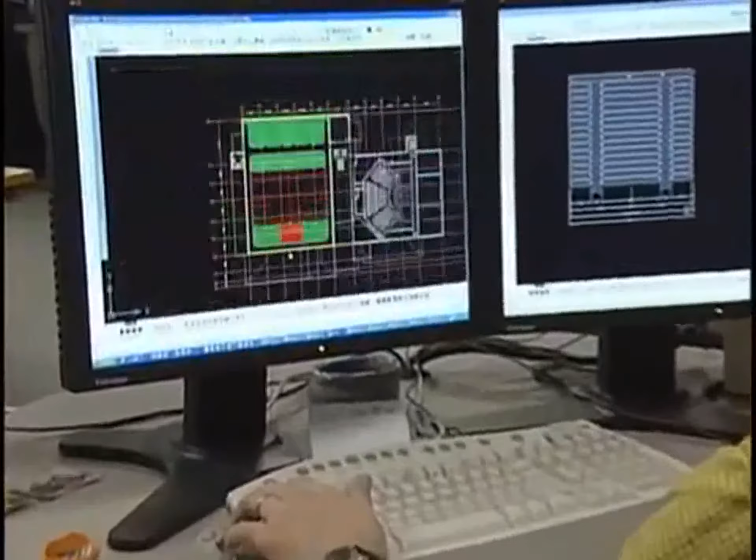The course covers telescopic seating systems, design considerations, bleacher types such as wall attached, recessed, reverse fold, freestanding floor attached, and mobile bleachers. You will learn about common seating surface options. We will discuss applicable codes pertaining to aisles and ADA requirements.

We will cover required and optional accessories, such as aisle rails, intermediate steps, end rails, back panels, and back rails, vinyl side curtains, power systems, and backrests. You will learn some basic components of the bleacher understructure, and we will point out important considerations for coordination with other trades. At the conclusion, we will review the main points and answer any questions you may have.

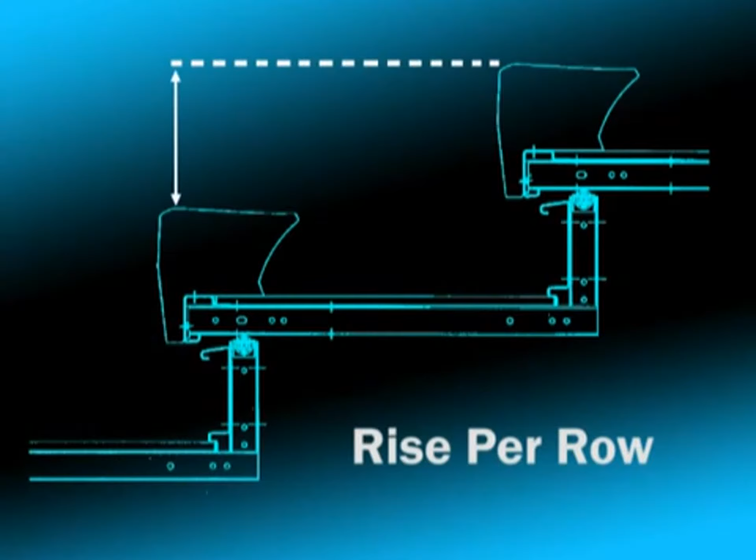We begin with a glossary of terms to help you become familiar with specific references made throughout the course. Following is a glossary to help familiarize you with terms commonly used in describing bleacher components and attributes. Rise per row. This is the vertical dimension from seat top to seat top or deck to deck. Multiple standard rises are available. Increased rise provides a better and more comfortable seat height and better sight line.

Row span. This is the horizontal dimension from front of seat to front of seat. Typical spans are 22-inch, 24-inch, and 26-inch depth for bench bleachers. Wide span depths of 30-inch, 32-inch, and 33-inch are available for VIP seating options.

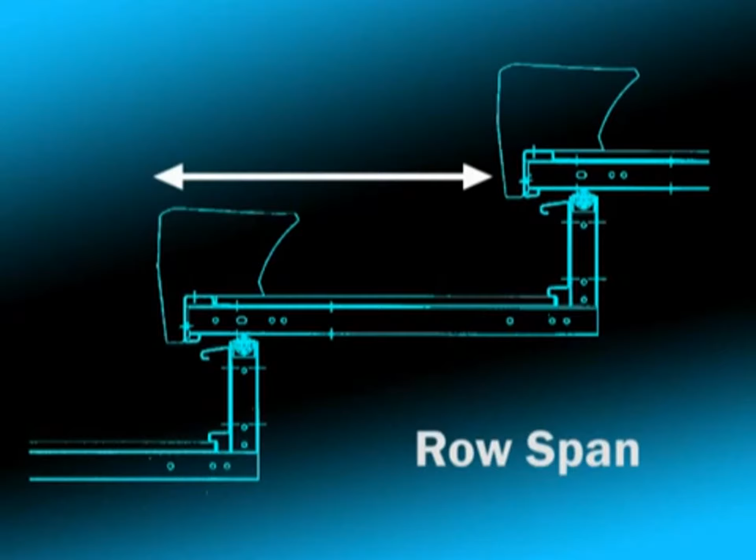Extended dimension. This is the distance from the wall or back rail to the front of the first row of seating with the system in its fully open position. The overall clear dimension will include the code-required first step. These dimensions will vary by number of rows, span, and wall obstructions.

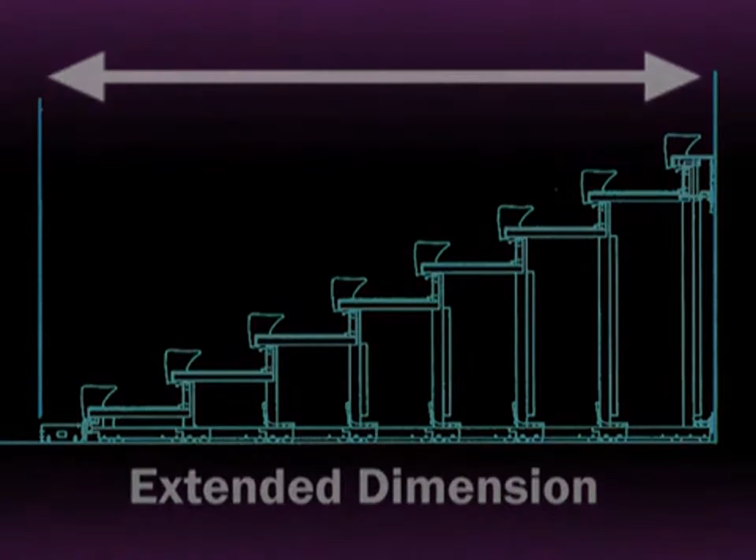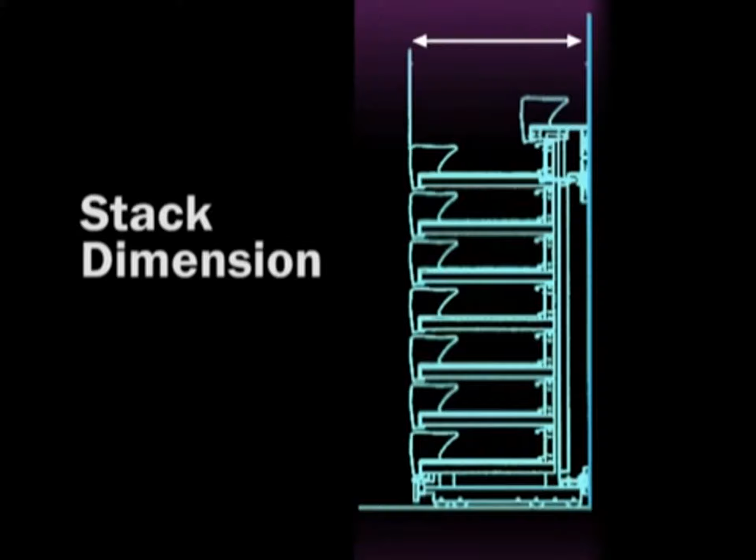Stack dimension. This is the distance from the wall or back rail to the front of the first row when the system is retracted or stacked. The stack size will vary if wall obstructions are present or with higher row reverse fold systems. Seat height. This is the height from the top of the seat to the deck surface.

Section. A section encompasses the deck assembly, seating options, and understructure that are the three major components of a bleacher system. Standard section lengths vary up to 26 feet, depending on number of rows and the bleacher type.

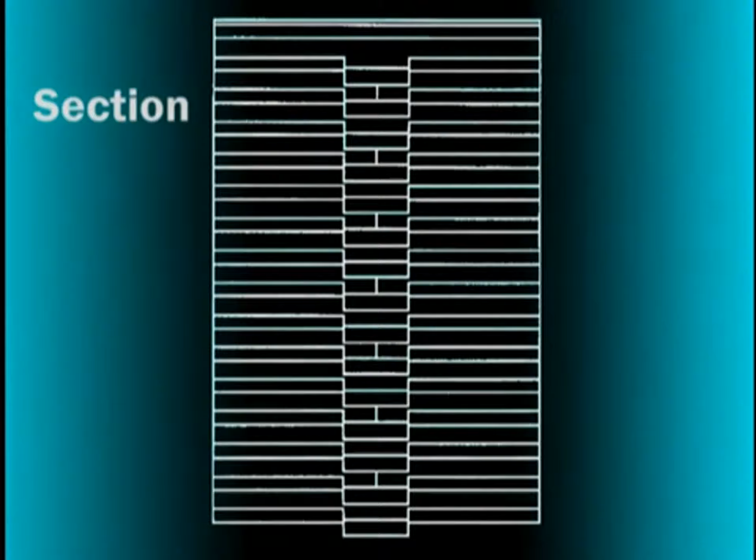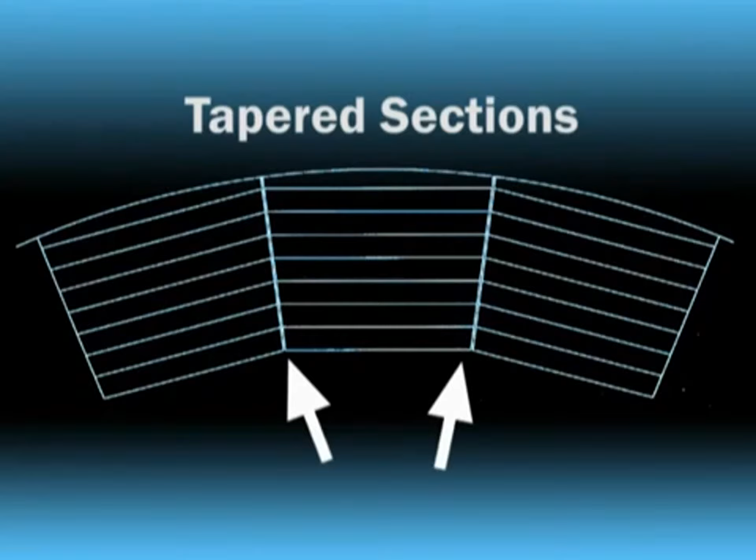Tapered sections. Used in radius corner applications, a tapered section is essentially a standard section with angled ends. This may be used with wall-attached, freestanding, recessed, or mobile units. While this option adds costs and complexity to the project, the use of tapered sections provides optimum sightlines and can produce a dramatic arena feel to the installation.

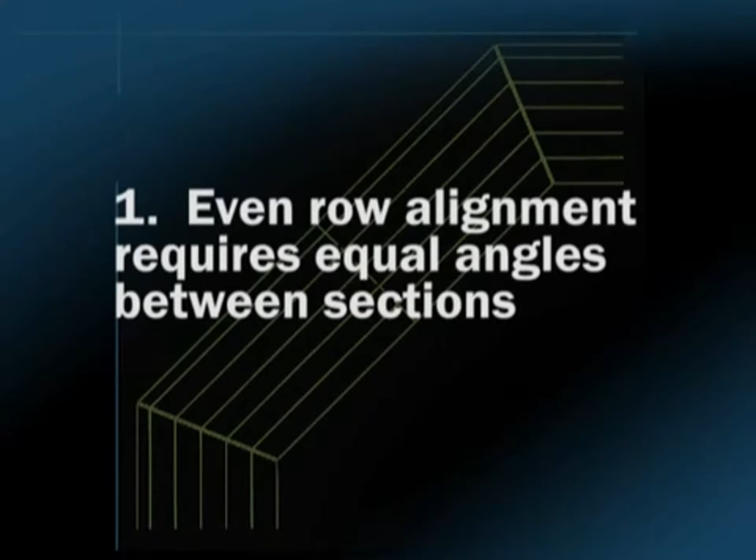The general guidelines and limitations to tapered sections are: Number 1. Even row alignment requires equal angles between sections. Number 2. Maximum angle of 22.5 degrees. Number 3. The first row length is required to be a minimum of 5 feet 0 inches, or a quarter of the length of the last row, whichever is greater.

Bank. A bank is comprised of a number of structural sections grouped to function as one group but not necessarily tied together. Bank lengths can vary from 16 feet to several hundred feet.

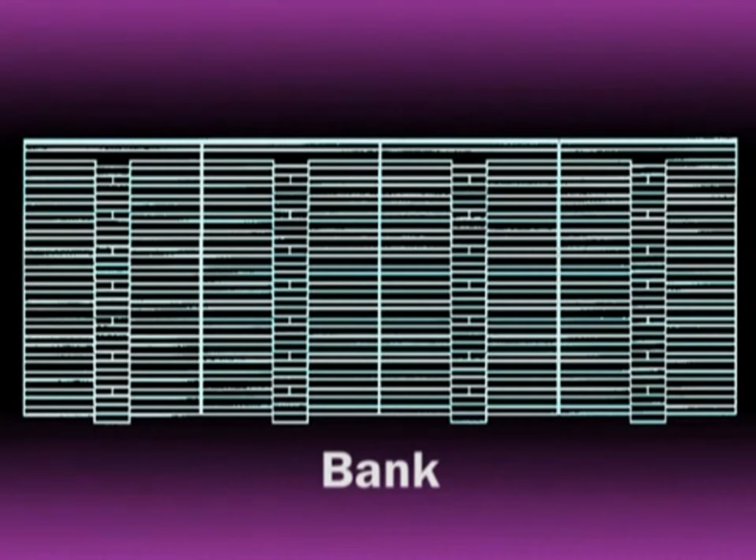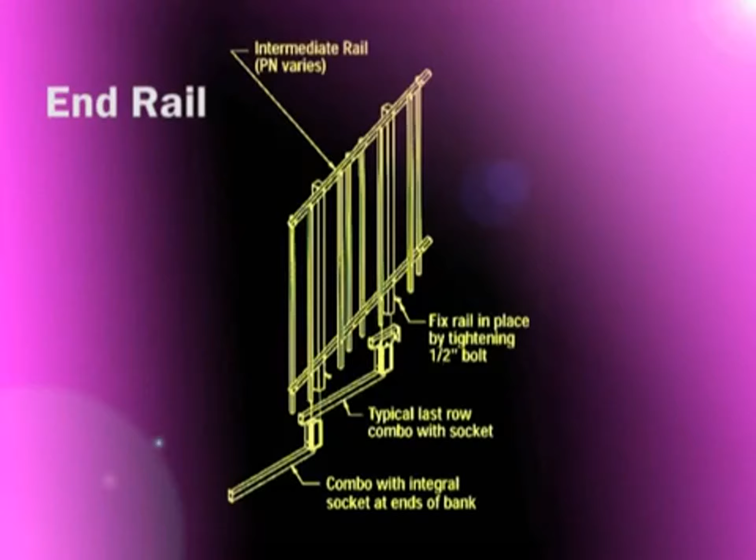End rail. End rails are located at bank ends of seating that are not located adjacent to a wall. All current building codes require end rails in this application. All end rails are designed to not allow a 4-inch sphere to pass, meeting the maximum clearance requirement, and also contain vertical members to eliminate ladder effect.

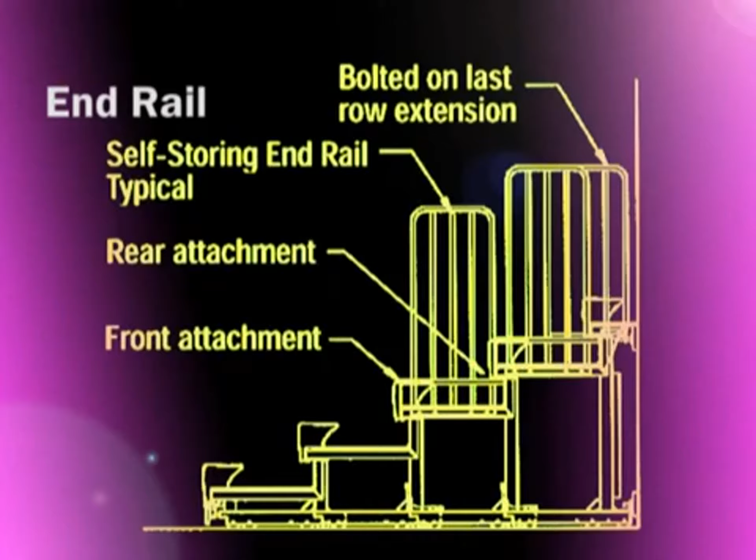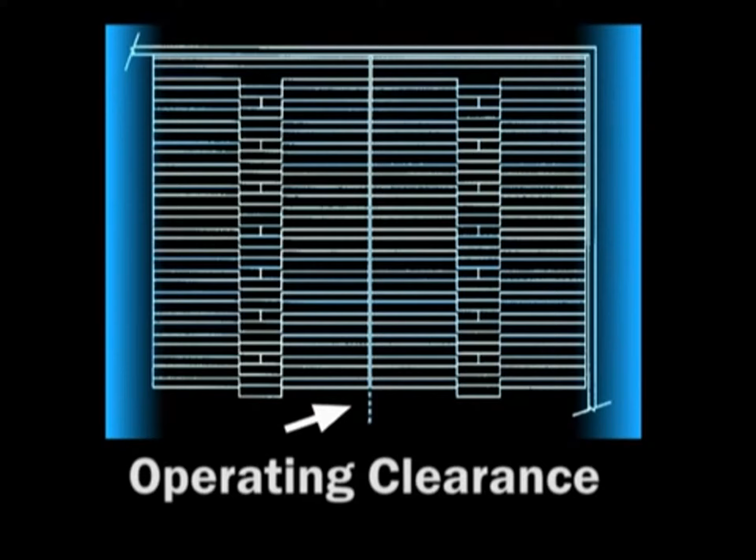Operating clearance. Referred to in two ways: 1. The operating clearance between sections. On manually operated banks, space is required between sections to assure adequate operating clearance. This helps eliminate binding and damage to the system if sections are not opened in straight alignment.

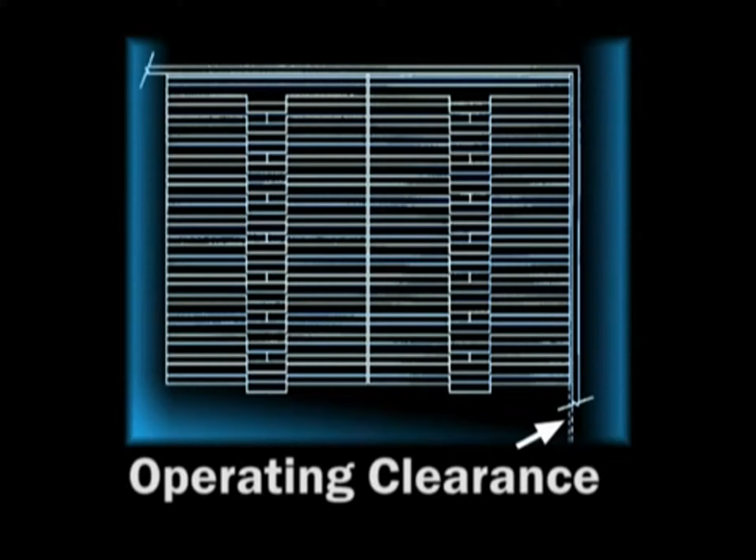And 2. The operating clearance to the side wall. This is the space required between the end of sections or rails and any wall or obstruction. In case sections are not opened in a straight alignment, this helps eliminate binding and damage to the system. The space required varies by number of rows and type of operation, but never exceeds the maximum 4 inches required by all building codes.

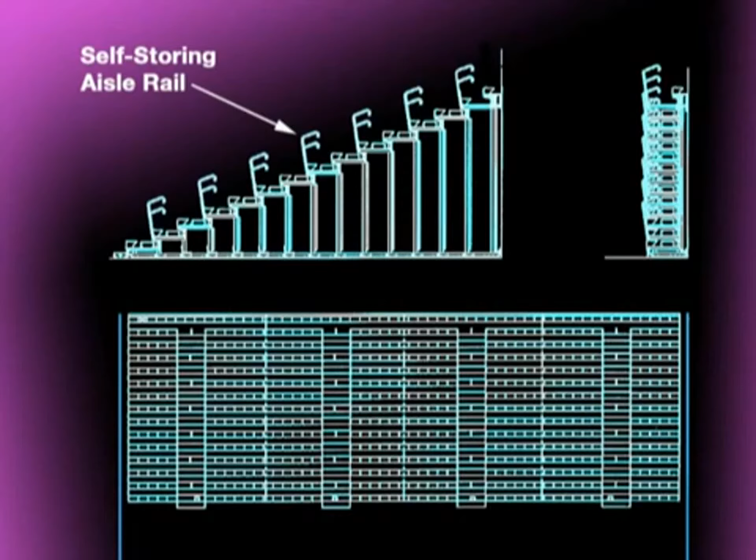Aisle rails. Aisle handrails are required by all current building codes. They are located in the center of each dual-access aisle and are available in several types, which will be discussed later in this program.

Intermediate steps. Intermediate steps are also required by all current building codes. They are provided to create a safe walking surface by providing an equal depth and height step at all aisle locations.

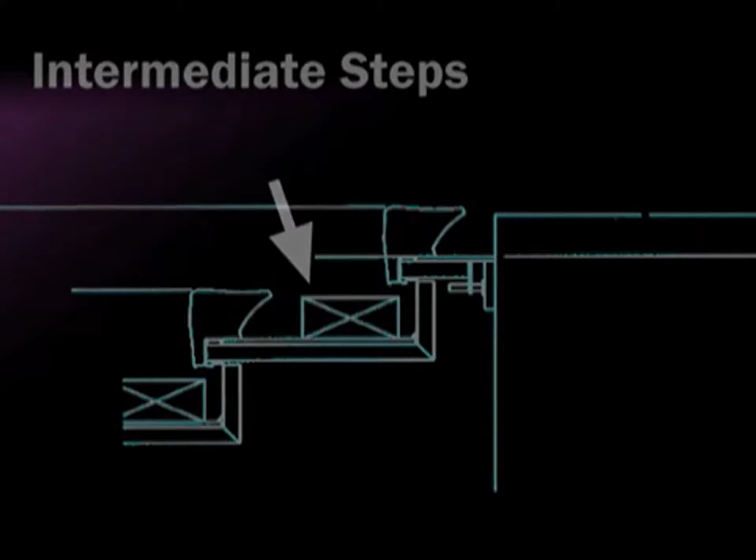Section 1. Design. Section 2. Bleacher types. Section 3. Applicable codes. Section 4. ADA provisions. Section 5. Optional accessories. Section 6. Understructure. Section 7. Coordination with other trades. And Section 8. Review.

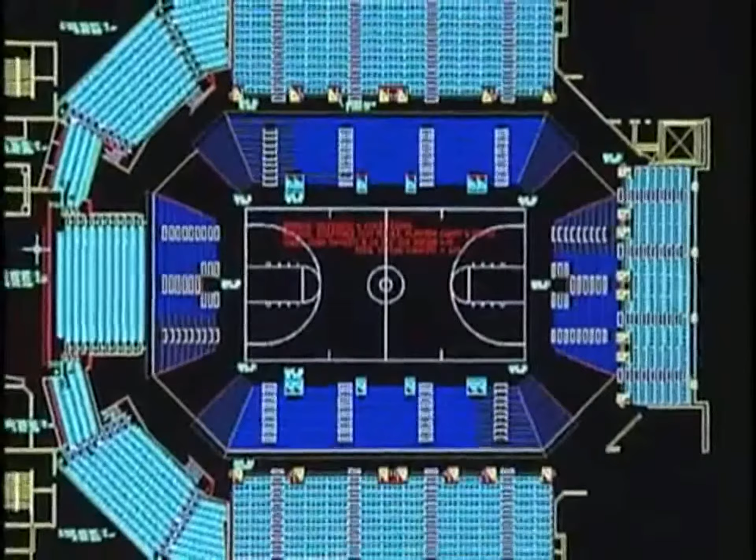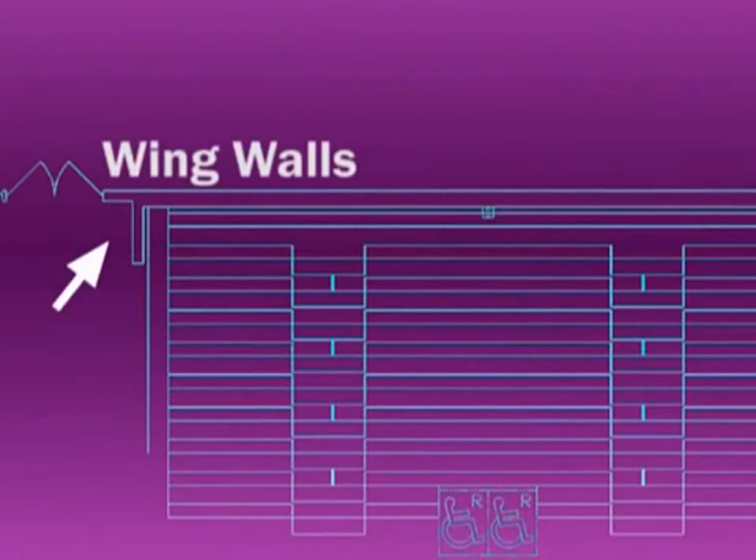Section 1. Design. The design process when planning telescopic seating for a facility starts by determining available space. Consider the length of clear space and depth available. The available length for telescopic seating is determined by the building design and location of doors, wing walls, and other wall obstructions, such as columns, pipes, and heating units.

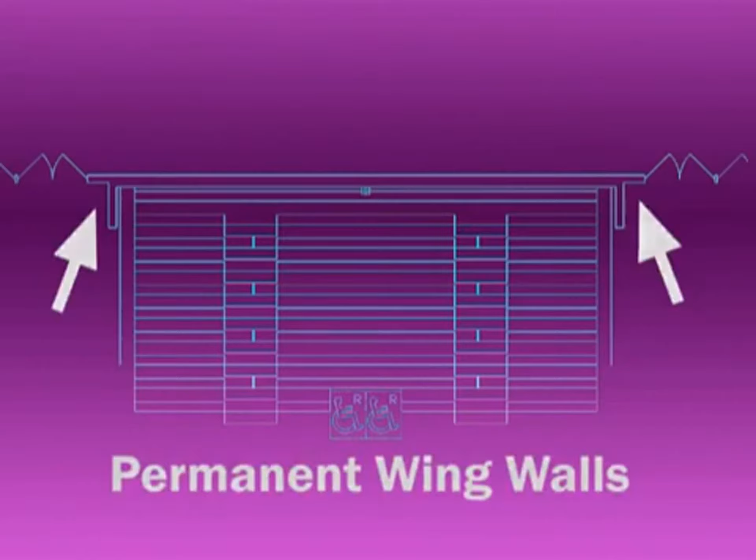The following drawings show examples of typical applications such as banks of seating between door openings, banks of seating between permanent wing walls, banks of seating in wall-to-wall applications. Depth is determined by span per row and number of rows. Typical spans include 22, 24, 26, or wide deck platforms 30, 32, 33.

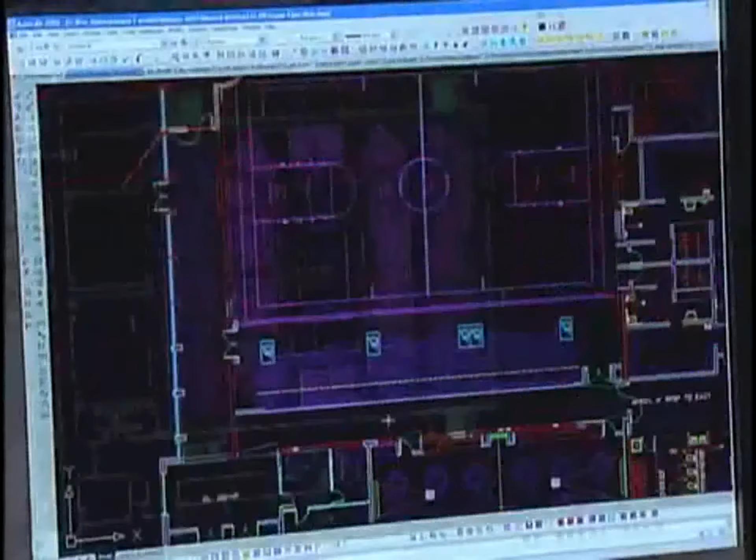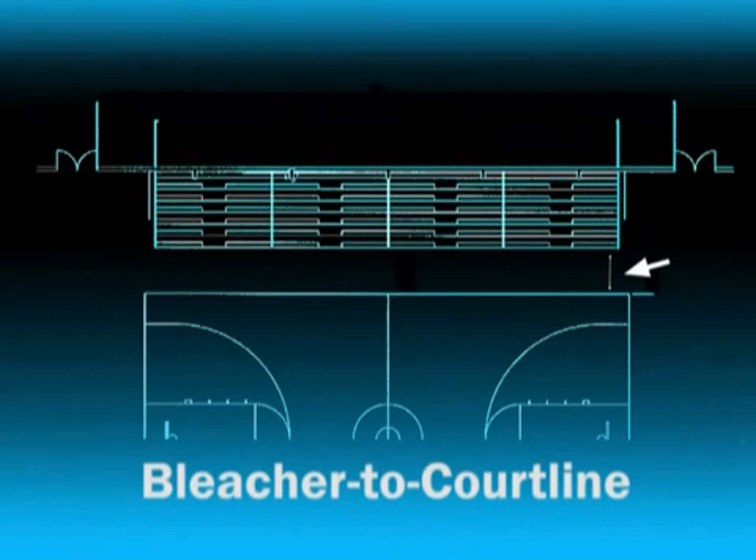Available depth clearances in a gymnasium are typically governed by the wall-to-court line clear dimension. Coordination with the end user on the amount of clearance from the extended bleacher to the court line is an important item for you to discuss with your client. Check with local governing agencies for recommended minimum clearances at both side court and end courts to ensure optimum safety code compliance.

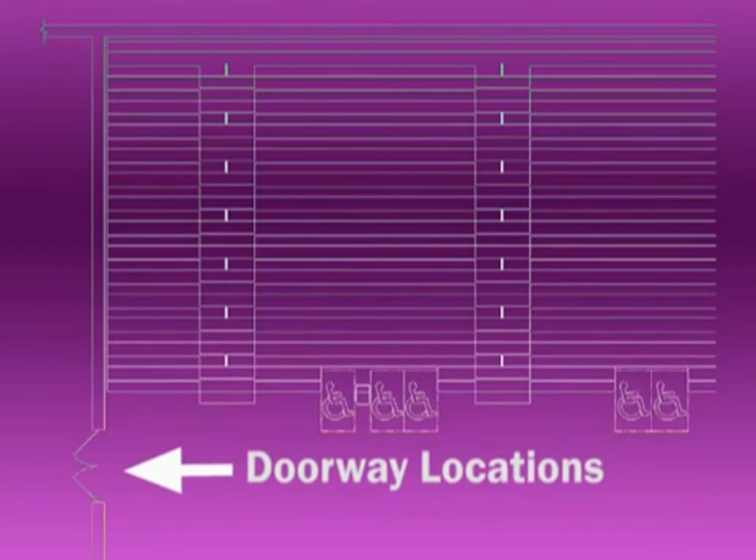Locations of doorways on the side walls will affect the bleacher depth. Please coordinate these locations with the bleacher extended dimensions. Identify height restrictions in order to determine rise per row such as 10 1/4, 11 1/2, or 16 inch.

Consider whether balcony access is required and plan for any obstructions such as basketball backboards, columns, door openings on side walls that may need to be accessed at all times. Other characteristics of the gymnasium, such as protruding pipes and heat registers, need to be taken into account.

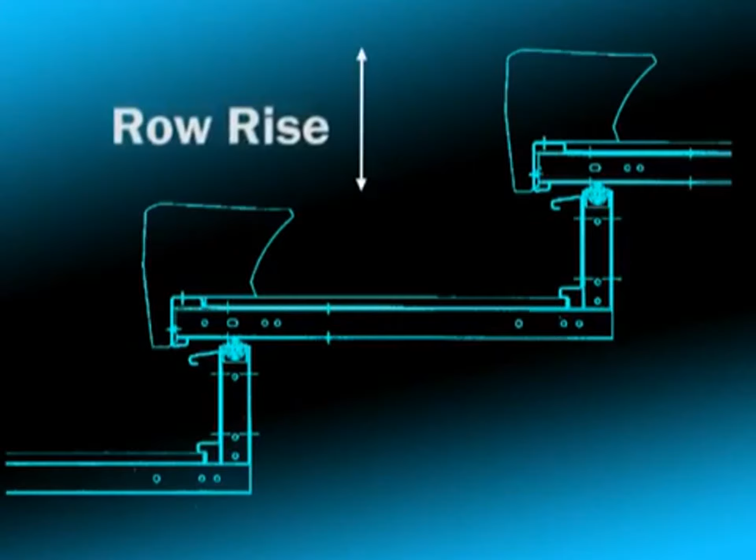Proper row rise, the vertical dimension from seat top to seat top or deck to deck, is important to achieve adequate sight lines. Multiple standard rises are available and increased rise provides a better sight line. 11 1/2 or 16 inch rise is recommended for optimal sight lines on balconies. Less than 11 1/2 inches rise does not provide wide scope vision of the main floor activities.

If balcony access is required, the rise per row will vary depending on the number of seating rows that will be provided. Careful planning of the number of rows, span per row, and rise per row is required to fit into the available depth. As an example, if a row must be added to achieve access into a balcony, the overall depth of the bleacher will increase and may push your bank of seating too close to the court line.

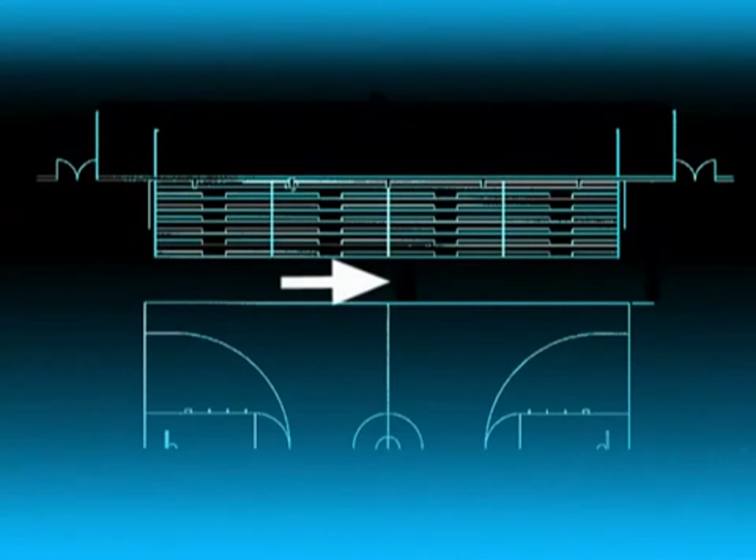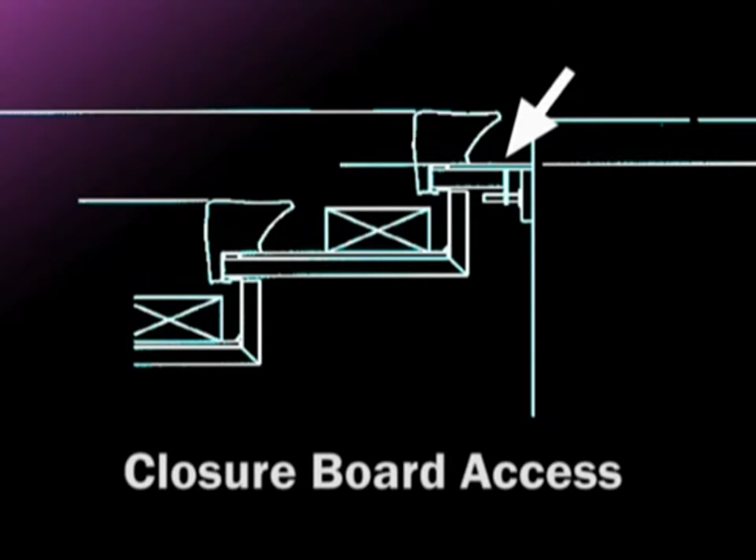There are several options available to achieve a smooth transition into the balcony. Options shown here include alternate standard rises, closure board access, extended closure access with additional step. A custom rise can be provided if all of these options shown do not work in your application. A custom rise for telescopic seating is very expensive to engineer and manufacture. For that reason, it should be the option of last resort.

Certain building codes allow for an uneven transition to adjoining construction if the steps are highlighted with contrasting color strips. Be sure to provide for adequate clearance of obstructions. Overhead obstructions are items such as side court backstops, lighting, building truss and ductwork. Overhead clearances for backboards, light fixtures, acoustic panels should be out of reach of spectators when they are standing on the bleachers.

Look for and dimensionally locate any doors, windows, pipes, ductwork, drinking fountains, columns, electrical boxes, conduit, cross bracing, floor or wall vents, divider walls or curtains, wall pads, fire extinguishers, switches, and outlets, including sidewalls. This will eliminate potentially non-code compliant conditions and provide an unobstructed view for the spectator and not hinder the operation of the bleacher. Also verify the minimum applicable building code clearance required above the last deck or last row seat.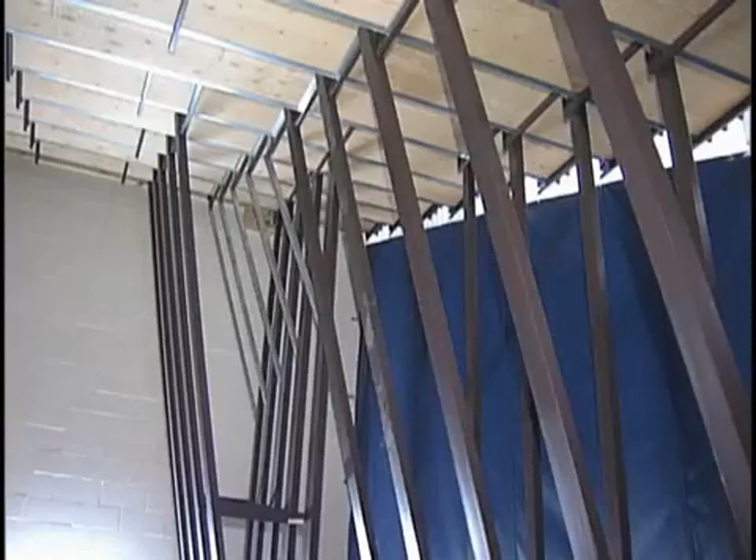Typical construction for this application may include block walls and poured concrete walls. In this typical application, the bleachers open in the forward direction. They are commonly available up to 30 rows and utilize either wall attachment and/or floor attachment. They may be specified with either manual or power operation. Rear cutouts may be necessary to accommodate column projections and other obstructions.

Standard sections offer best economy. Individual sections make up banks of seating. For cost efficiency, use standard section lengths and minimize the number of sections in each bank. For example, a 100-foot bank of seating may consist of 4 25-foot sections. Code compliance and all load testing data is based on the longest possible section lengths.

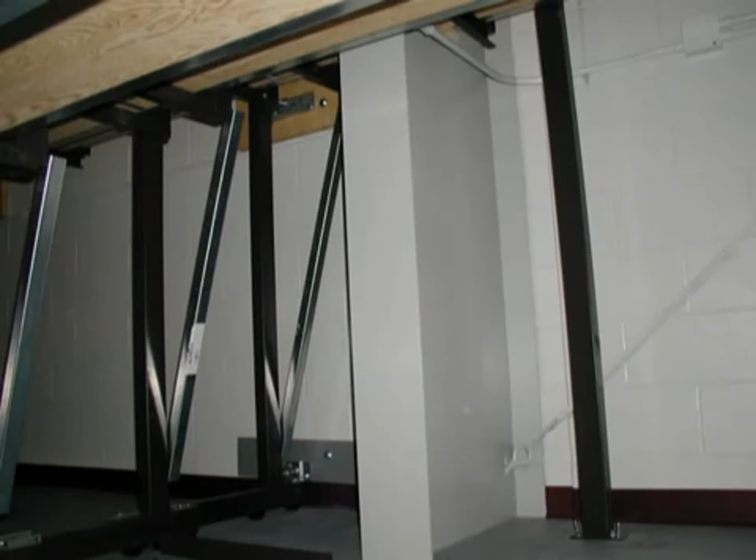Certain wall requirements should be taken into consideration. Ideally, the walls to which the seating will be attached will not have column projections or other obstructions greater than 1.5 inches. When columns extend further than 1.5 inches into the room, it is recommended that the seating be cut out around the column rather than installing in front of the column and filling the space to the wall, or employing back rails. Both of the methods are more expensive and require more extended dimension than the cutouts. At column cutout locations, structural supports are added to ensure the deck surface is properly supported. Plywood decks are scribed tight to the columns to eliminate all gap openings.

Recessed telescopic seating systems require minimal clearance to fit conveniently under a balcony overhang. Typically, a recess is created by extending the balcony over the main floor and using this space as storage for the retracted telescopic bleachers. The purpose is to achieve more balcony space and more usable main floor space when the system is fully retracted. Available with various seating options and typically up to 30 rows.

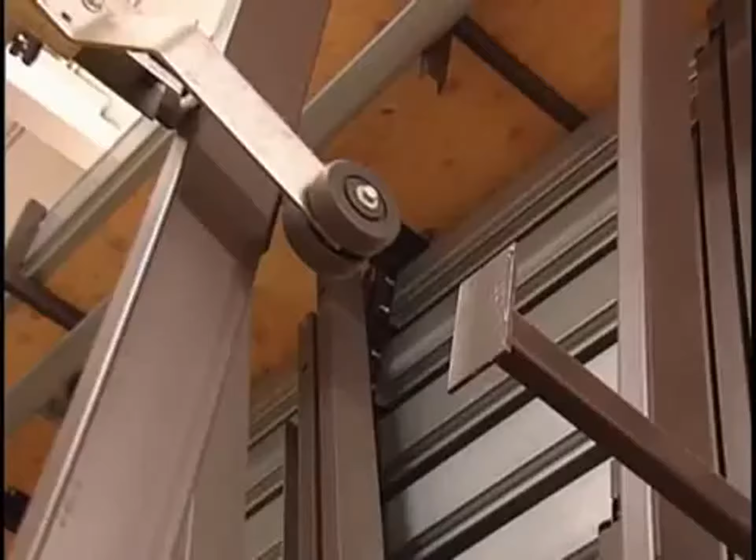With the proper engineering, the unit can be closed nearly flush with the back wall, allowing the stacked bleacher to be contained completely under the overhead walkway. A recessed system utilizes extra rows of understructure linkage or scissor mechanisms in order for the bleachers to stack under the balcony. It is important to note that recessed system stack dimensions are larger than wall-attached systems. The recess opening or clearance between the top of the last row seat and the underside of the recess is recommended to be approximately 3 to 4 inches, but can be as small as 1.5 inches.

Since the recessed units can serve as access to the balcony seating, it is necessary to coordinate the balcony height with the height of the last row of seating. Recent building code changes allow for step heights to vary as you transition to adjoining construction if properly marked with contrasting step colors. These tolerances may be unachievable and code variances may be required. Please consult the manufacturer for design assistance.

Reverse fold systems are designed for applications where space behind the bleacher stack is desired for other activities when the bleacher is not in use. This is common in areas such as mezzanines or balconies. Typically, up to 18 rows can be specified with this type of system. Reverse fold units are frequently seen in balconies, but can also be used on the main floor. This type of application is mounted to the floor at the first row, and the entire unit moves in a reverse direction until fully extended.

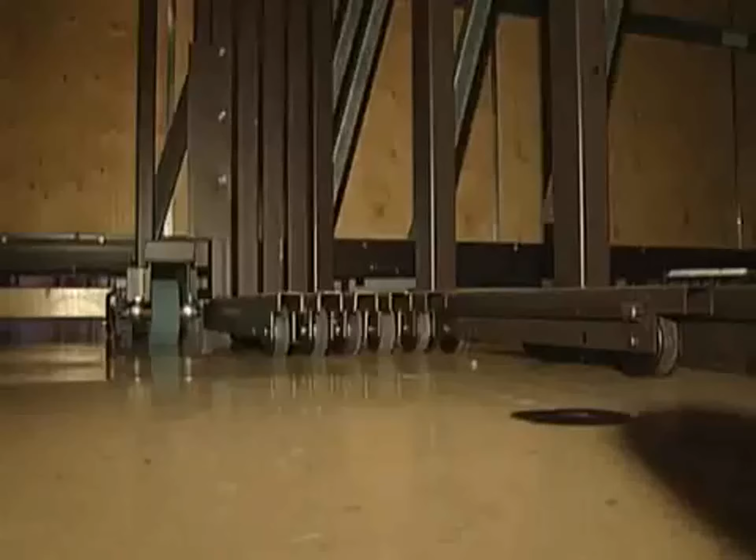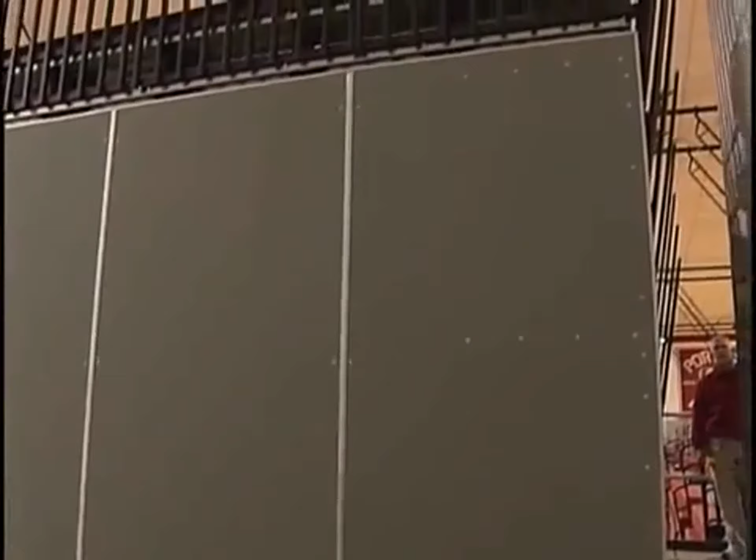These units create a natural wall to separate areas. Since reverse fold systems are generally located away from a permanent wall, back panels and back rails are required for spectator safety. The standard height of the back panel is 8 feet. The back rail design shown here contains vertical intermediate members to eliminate ladder effect.

Proper row rise is important to achieve adequate sight lines. 11.5-inch or 16-inch rise is recommended for optimal sight lines on balconies. Less than an 11.5-inch rise does not provide wide-scope vision of the main floor activities.

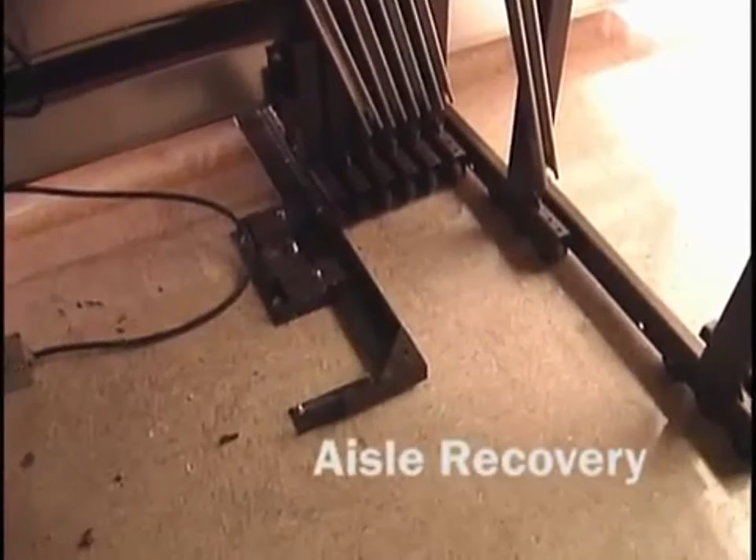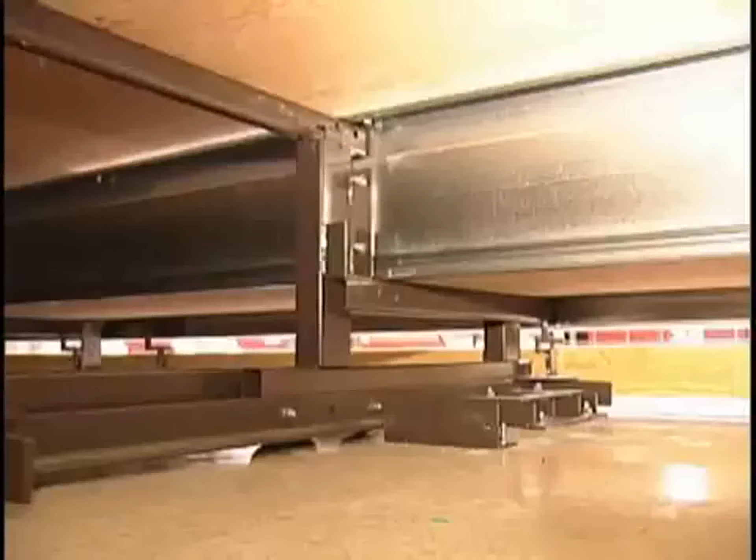This is achieved by a concealed mechanism under the lower rows. The freestanding floor-attached method is an option when wall construction or building shape won't allow you to attach to the wall. In these cases, there are systems that attach to the floor. Applications may include metal walls or round buildings.

Similar to wall-attached units, freestanding systems are permanently attached to the floor only. It is very important to verify that the flooring is suitable to anchor the rear row vertical posts of the bleacher. When freestanding units are located away from a wall, back panels and rails are required for safety purposes. The standard height of the back panel is 8 feet.

Typical freestanding system guidelines are 20 rows at 10.25-inch rise, 17 rows at 11.5-inch rise, and 12 rows at 16-inch rise. Always contact the manufacturer for additional information specific to applications requiring more than 20 rows, and note that larger stack dimensions may be required.

Mobile systems consisting of single sections of bleachers up to 21 feet wide can be used in one part of a building and stored in another on the same floor level. They offer increased flexibility since these are independent, self-supporting units that do not require anchorage to either wall or floor. Typically used in the gymnasium, music room, cafeteria, and classrooms, they provide the ultimate in flexibility along with easy manual operation.

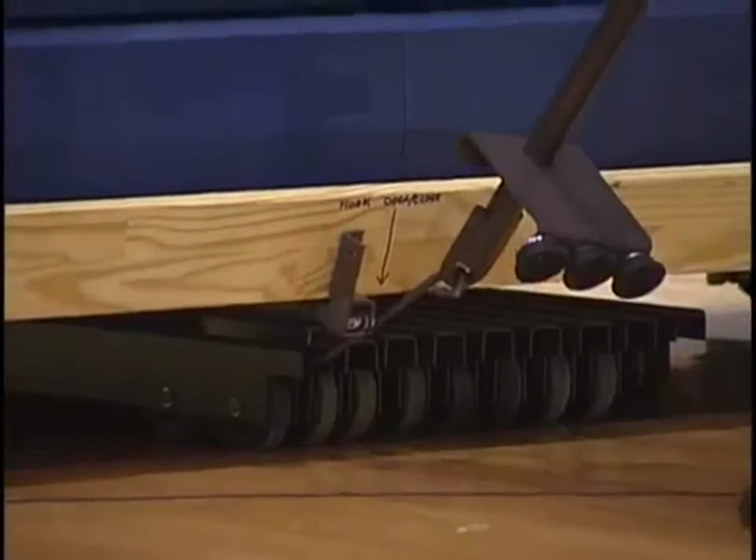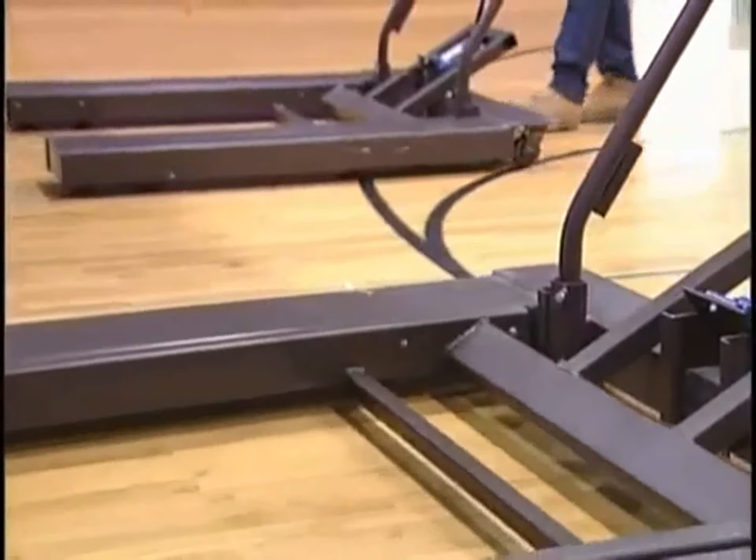Manufacturers offer them with various seating surface options, typically up to 14 rows at 10.25-inch rise and 12 rows at 11.5-inch rise, and all available back-to-back seat spacing. Portable hydraulic dollies are required for transportation of units up to 14 rows to and from various spectator or storage areas. Hydraulic trucks are required to move mobile units. They are freestanding. One pair may be utilized for moving multiple sections.

The row limitation on wood or concrete floors is a maximum of 12 rows with an 11.5-inch rise, or 14 rows with a 10.25-inch rise. On synthetic floors, a maximum of 9 to 11 rows is recommended for convenient handling. With proper planning, the desired seating capacity can be achieved without oversized mobile units that can be difficult to handle.

Back panels and back rails are required by code for safety purposes. The standard height of the back panel is 8 feet. When the units are open or closed, back panels provide a flat wall surface and discourage access to the understructure. The back rails shown on this unit contain vertical intermediate members that eliminate the ladder effect and discourage climbing.

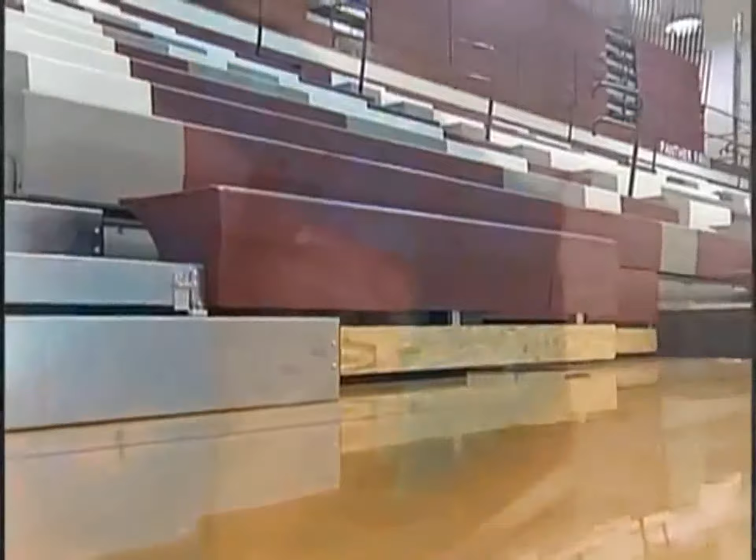Manufacturers have varying methods of attaching the plastic modules to the deck. In the example shown, a specially designed attaching clamp provides maximum rigidity with steel-to-steel connection of the module. Here each module incorporates full half-inch perimeter interlock to secure one module to the next for increased strength. 5 vertical and 2 lateral ribs inside each module provide increased strength and are positioned for easy cleaning.

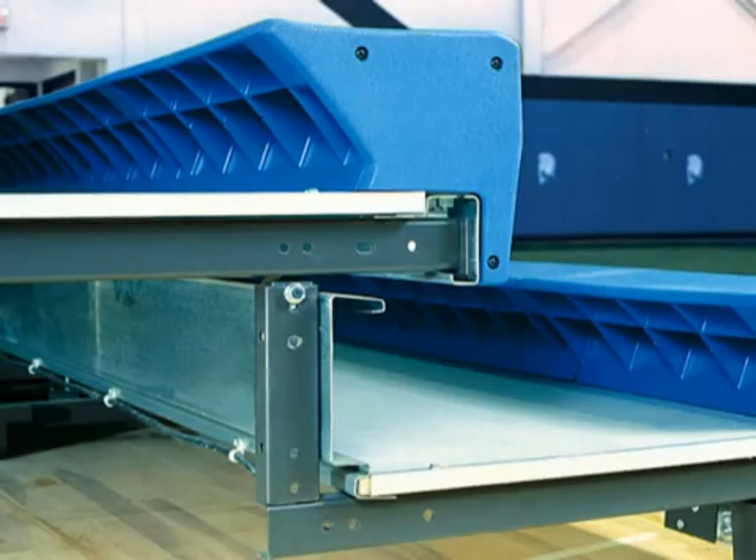Classic wood bench seating is typically constructed of 3/4-inch grade B and better southern yellow pine with a clear polyurethane coating. These wood seats and front riser boards are finished in classic style to enhance the appearance of the gymnasium or field house.

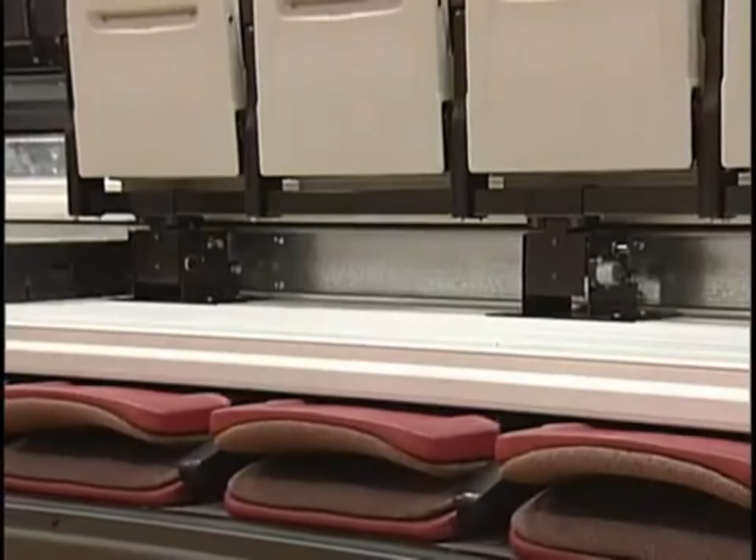Platform chairs can be mounted on the telescopic understructure to create a VIP seating area. Manufacturers offer them with manual or semi-automatic operation. They are only available with back-to-back spacing of 30, 32, or 33 inches.

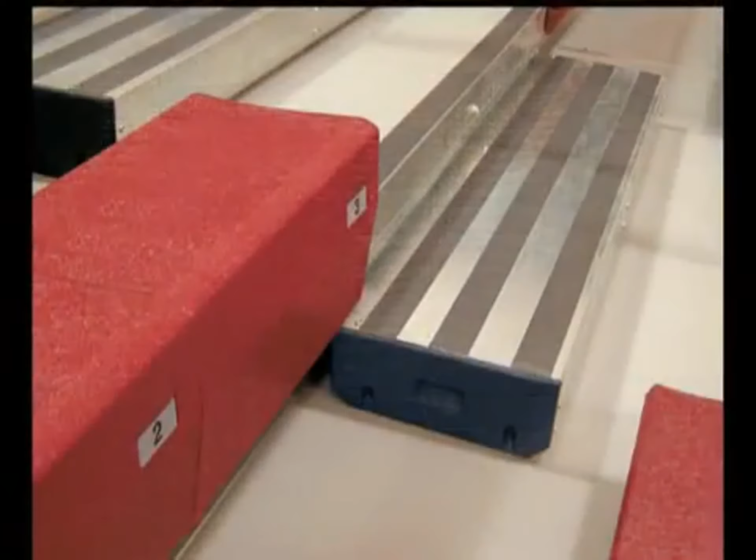Section 3. Code Compliance. Every bleacher configuration must conform to applicable code requirements for center aisles, center aisle rails, intermediate steps, back panels and back rails, along with safety end rails. Aisle center rails are installed on alternating rows and are required by all building codes for spectator safety.

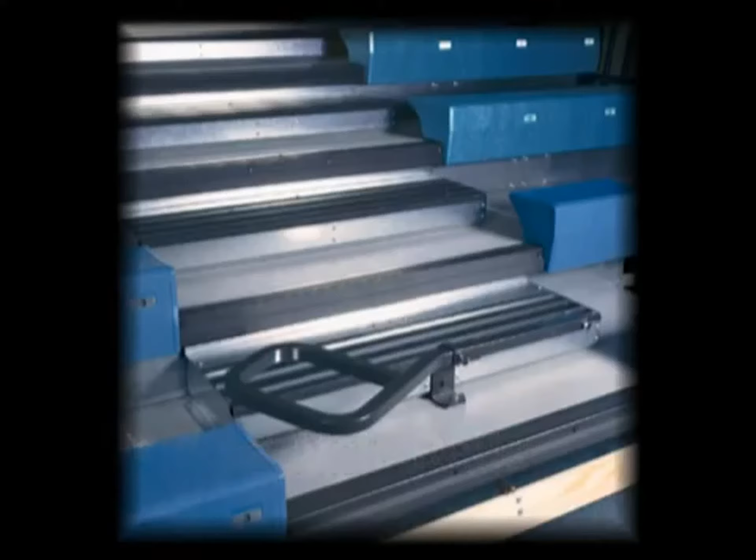There are multiple types including folding, which are permanently attached, fold over and store on the deck when not in use. Removable, also store on the deck when not in use. Both folding and removable require labor to set up and take down each rail. Permanently attached self-storing aisle center rails, as shown here, are fully automatic, eliminating all setup labor.

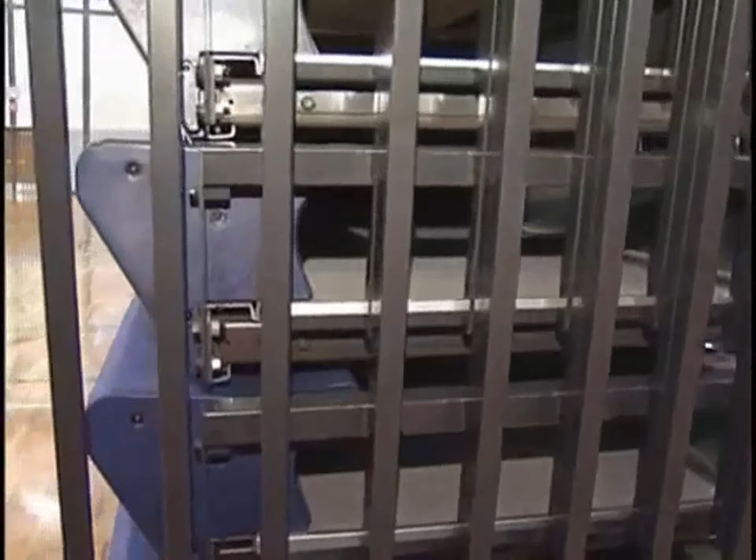This particular design is fabricated from round tube steel for safety by eliminating sharp edges that could pose hazards to patrons. This design also has no significant protrusion from the bleacher stack when in the closed position, which promotes a safer environment.

Another significant advantage is that they are fully automatic and make setup and takedown much faster and easier for facility personnel. The rails are permanently attached to the bleacher and automatically move into position when the unit is extended, eliminating labor and setup costs for the facility.

Intermediate steps are required by all current building codes to provide an equal depth and height foot surface between rows. Safety abrasive tread is provided on all steps for additional spectator safety. Intermediate steps are securely mounted to provide a firm walking surface. If columns protrude into the last row walkway, additional aisles may be required for code compliance.

Safety end rails are required on open ends of telescopic seating systems. These are available in self-storing and removable types. The self-storing end rails, shown here, offer safety with convenience. Each end of self-storing end rails typically requires 16 inches to 18 inches of clearance to walls or obstructions.

The rails mount to the underside of the deck with additional supports attaching to the rear riser and nose beam. This eliminates all setup labor. Removable end rails mount into sockets attached to the rear of the deck support. Rails may be folded and stored in the retracted bleacher. Typically allow 5 inches of clearance to any obstructions for removable end rails.

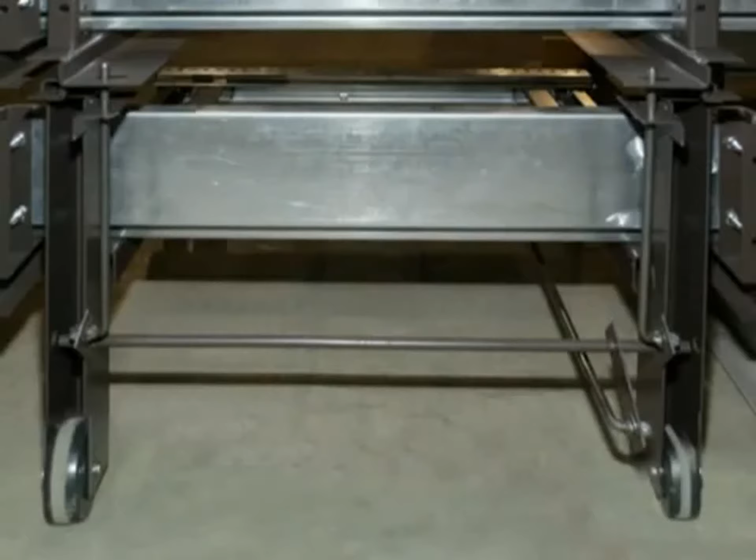Recessed 1-row deep seating truncations are available to accommodate larger groups of people or team seating. The amount of handicap seating required will depend on total number of seats and the applicable codes. ADA code requires that these seating locations be evenly dispersed throughout the seating area.

Section 5. Optional accessories. Vinyl side curtains are available to close off the ends of the bleacher when in the extended position with a heavy-duty laminated vinyl. Grommets are available at every hanger location and incorporate a chain-weight bottom hem. They are available in many colors. If there are doorways at seating bank ends, vinyl side curtains can provide a vertical barrier which may be required by applicable codes.

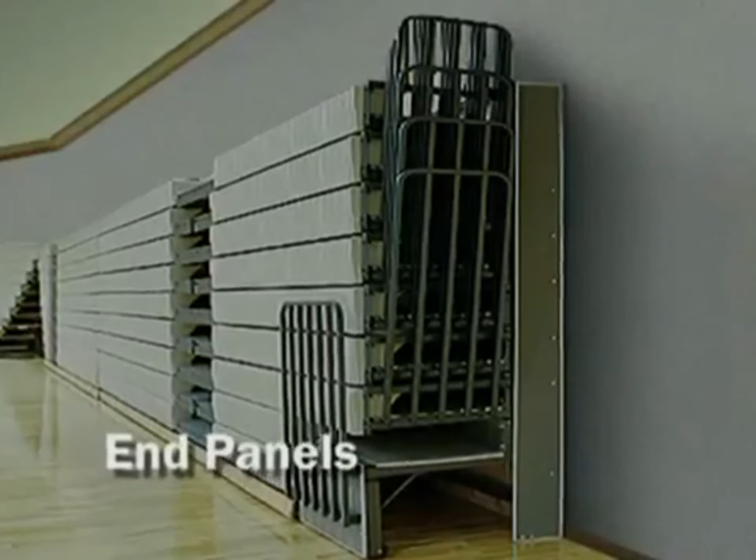End panels are available to close off the opening behind the rails of the stacked bleacher. The style shown here is constructed of half-inch poly-coated plywood with aluminum edge trim. Other styles and grades are available from different manufacturers.

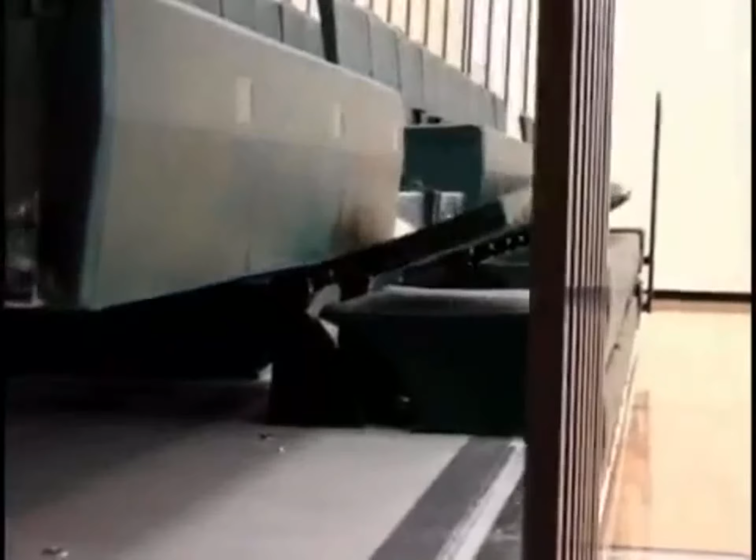Backrest options are available in manually raised and lowered wood or plastic with manual, semi-automatic, or fully automatic operation systems. The style shown here features fully automatic operation. These backrests store by the closing operation of the bleacher. Each row of backrests is raised and lowered with absolutely no labor required. A concealed spring mechanism eliminates any pinching hazard.

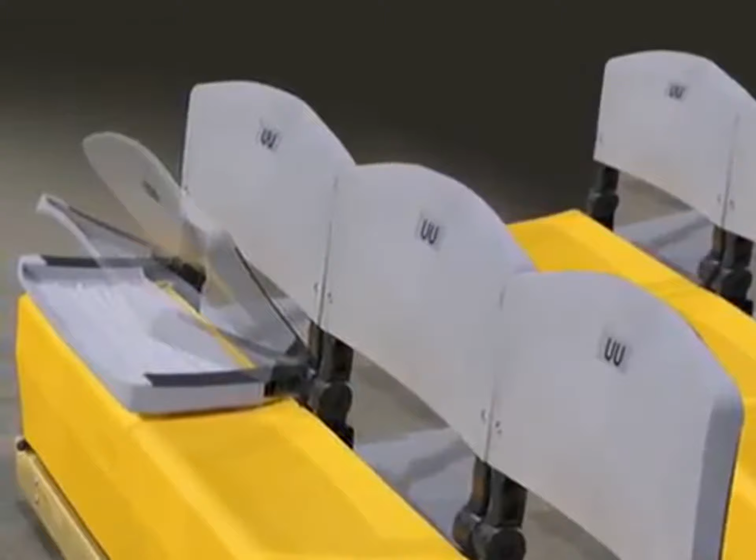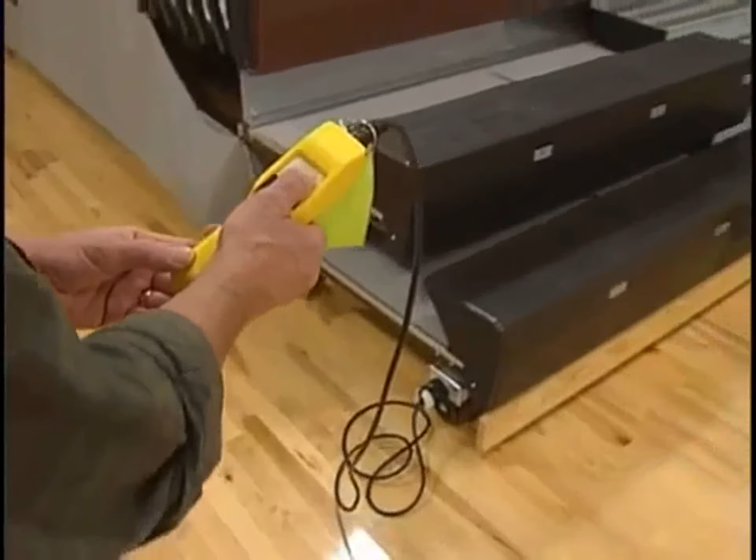Ergonomically designed with greater spectator comfort, these backrests are 18 inches wide and available with 30, 32, and 33-inch spans, requiring 11.5-inch rise. Specifying the correct power system to operate the system smoothly and efficiently is important. There are two basic types of systems.

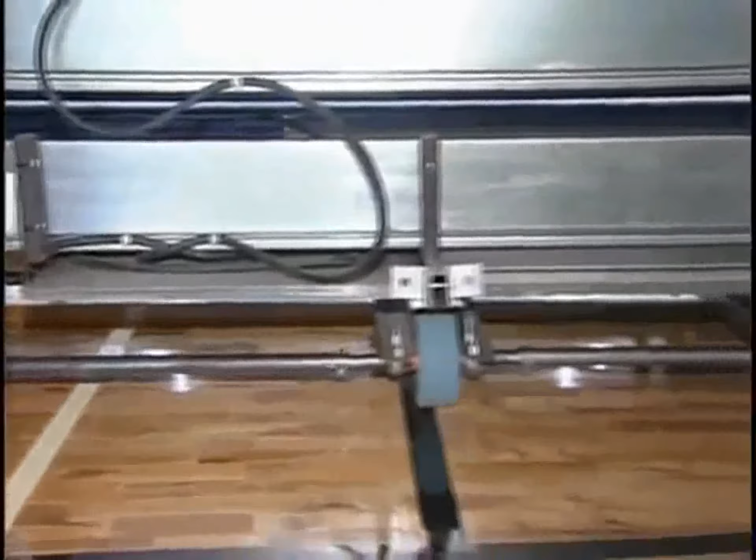Friction power systems, typically used with bleachers up to 26 rows, incorporate friction drive rollers as an integral part of the first row assembly. The number of motors and friction rollers will vary by number of rows requiring operation. In the large seating system shown here, multiple roller assemblies were required.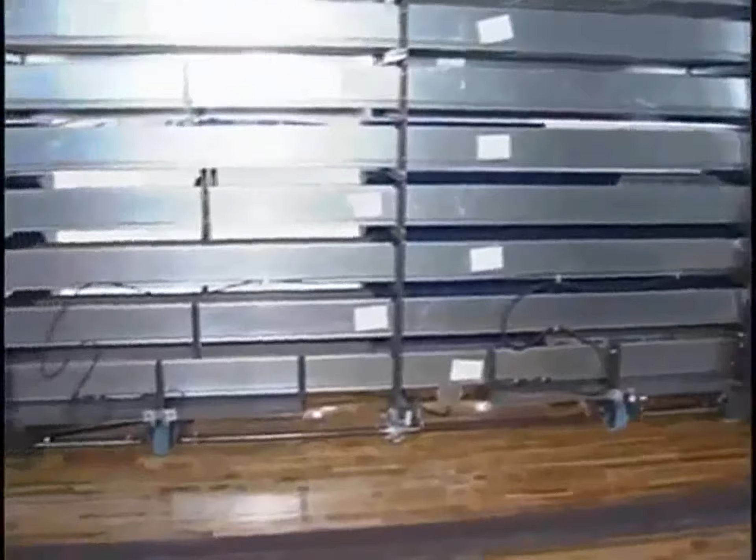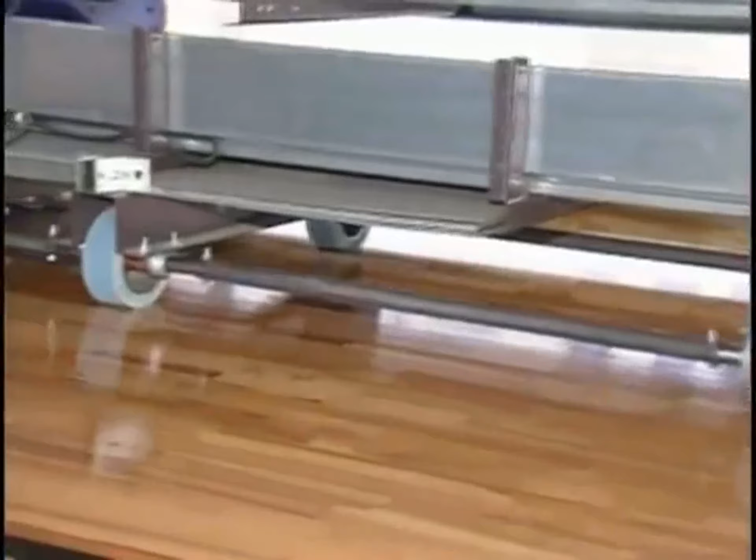Most typical bleacher banks have two friction roller assemblies linked together by a continuous drive shaft driven by a half horsepower 208-volt three-phase motor per structural section and spaced apart to overcome minor variations in the floor surface. This continuous drive shaft controls drive roller operation in a straight, efficient manner, especially important on bleacher banks which include numerous notch outs or truncations.

An important safety-related accessory that may be added to a friction power system is a motion monitor. This device is designed to send an audible and visual alarm signal prior to the bleacher operation. A built-in delay allows patrons or facility personnel to move away from the bleacher before movement begins.

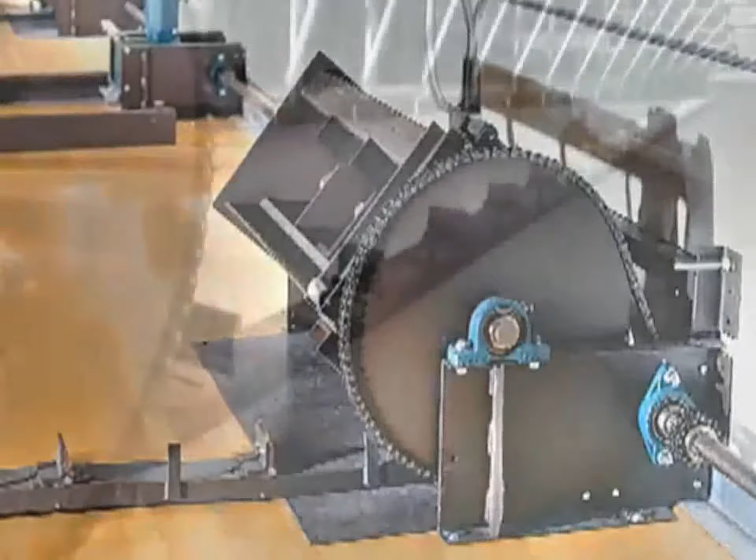A non-friction power system is a fully automatic power system designed to open and close wall attached, recessed or reverse fold telescopic bleachers without the need for traction force on the floor. Typically used for higher row or synthetic floor applications, it has the capacity to move more rows of bleachers than other mechanical power systems and incorporates 16-inch long chain drive pusher links for dependable performance as well as non-slip straight line operation.

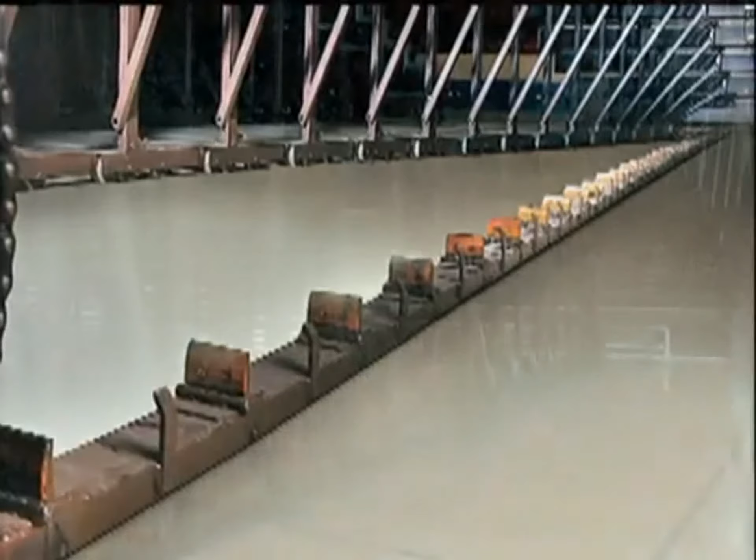Both friction and non-friction power systems are connected to the first row of the understructure. These power systems, along with the components and design of the understructure, play a key role in the overall telescopic bleacher system reliability, longevity, and feeling of stability experienced by spectators. The bleacher manufacturer should be able to assist you in properly specifying a power system strong enough to hold up to years of use.

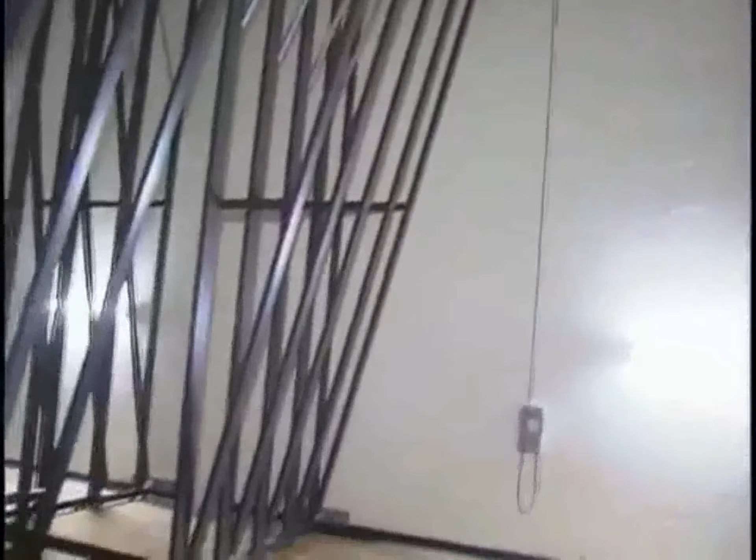Section 6. Understructure. As an architect, you want to recommend a system that is going to provide reliability for your customer, their patrons, and setup and maintenance personnel. As you consider various bleacher designs, you'll want to look for components that add longevity. Here are some examples. Row locks.

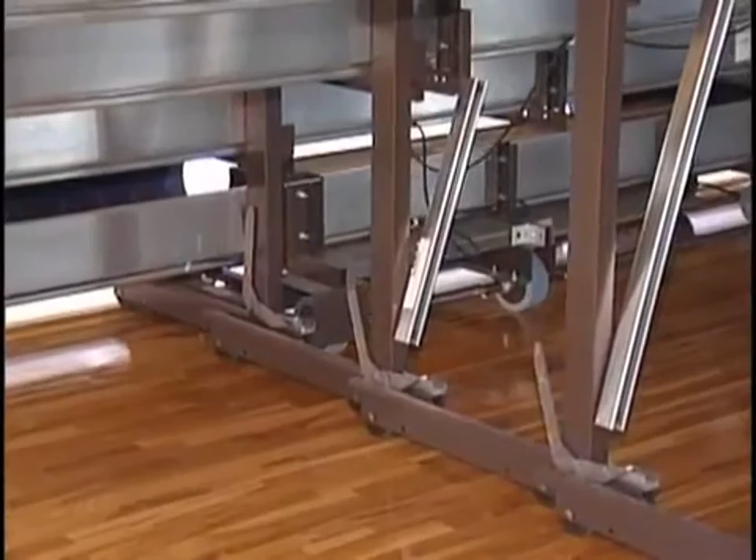These stabilize the bleacher under load in the extended position by securely locking each support post to an adjacent post. They automatically engage and release for the opening and closing operation. Individual row locks make it possible to open any number of rows without opening the entire bank of bleachers. These are positioned on a number of beginning rows depending on the overall size of the seating bank.

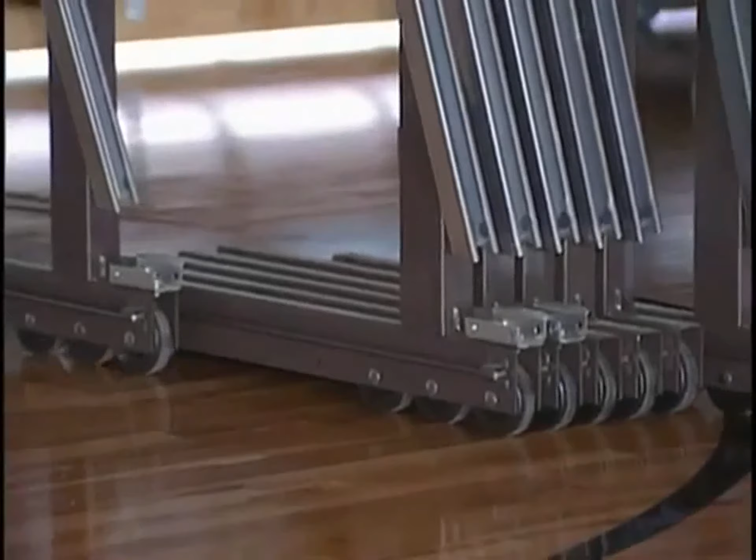Guidance systems, such as the one shown here, are a low-friction, flexible rod system that assures positive engagement of vertical supports without binding for smooth operation over uneven floor conditions. It maintains proper vertical column spacing, reduces wear, and helps eliminate what is called racking damage.

Deck supports help prevent sagging and potential binding during operation. Adding stability, they play an important role in the patron's feeling of safety and security as well. If the understructure employs nylon rollers at the top of every deck support as shown here, friction is minimized for smoother, quieter operation, and the steel-to-steel contact, which could otherwise hinder the operation of the bleacher, is totally eliminated.

Sway braces fabricated from steel are essential for bleachers to resist the compression and tension forces created when the bleachers are loaded. The overall number of sway braces is determined optimally by 2 per row per section. A well-engineered understructure, when properly maintained, will greatly enhance the lifespan and performance of the bleacher.

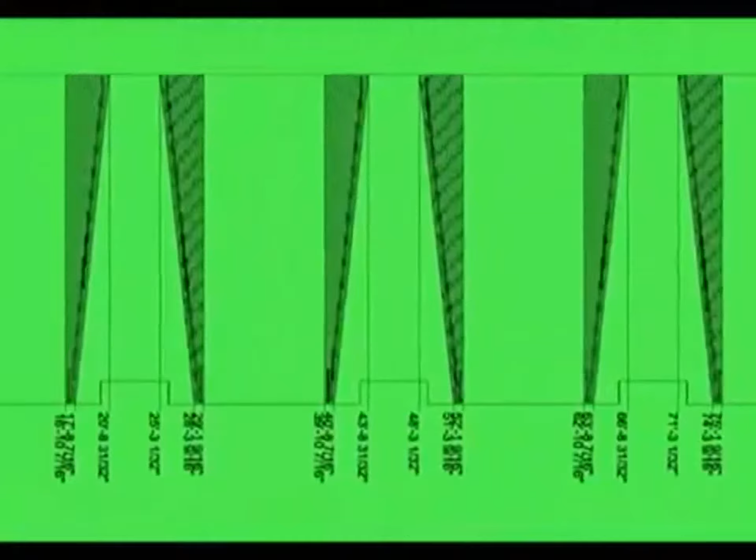Section 7. Coordination with other trades. Communication is important to ensure the bleacher you specify is a trouble-free part of the project. Coordinate solid blocking under the bleacher support locations with the wood floor supplier. Wheel travel layouts can be provided to ensure the proper location of the wood blocking.

Also coordinate the installation sequence of the telescopic seating system with the floor supplier. Options include a complete floor installation with proper finished court lines before the bleacher is installed, or the bleacher installation can be completed prior to painting of game lines and top finish coats.

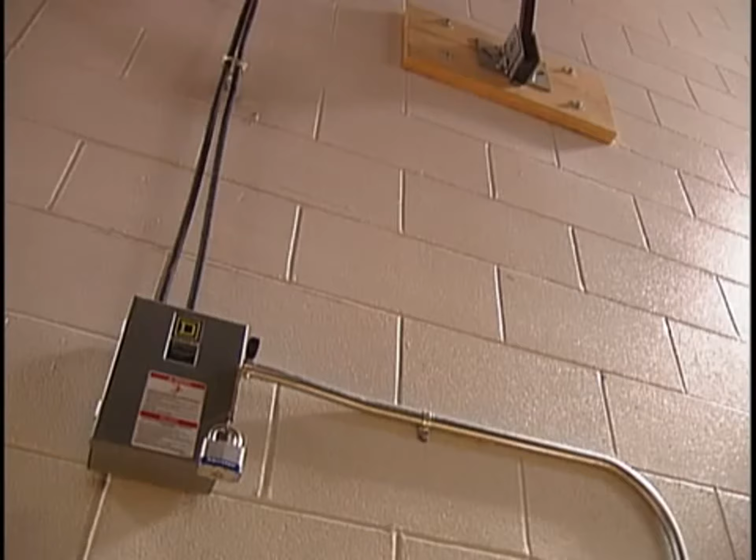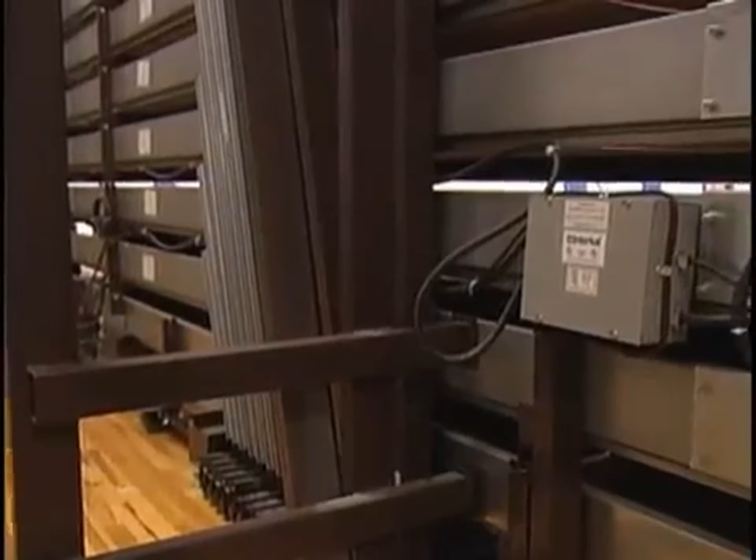Coordinate the bleacher's electrical requirements with the electrical subcontractor. For instance, a minimum of 1 junction box must be provided for each bank of power to be located per the manufacturer's instructions. The electrical contractor must furnish and install conduit, wiring, and junction boxes. The electrical contractor shall perform the connections to the seating equipment at the safety disconnect. Motors, typically 208-volt 3-phase, housing and wiring shall be installed by certified personnel.

Coordinate balcony gate locations, if applicable, with the bleacher aisle layout. Identify gate locations and sizes. Identify balcony rail dimensions and mounting. To ensure code-compliant transition into balconies, coordinate balcony heights with the bleacher structure heights.

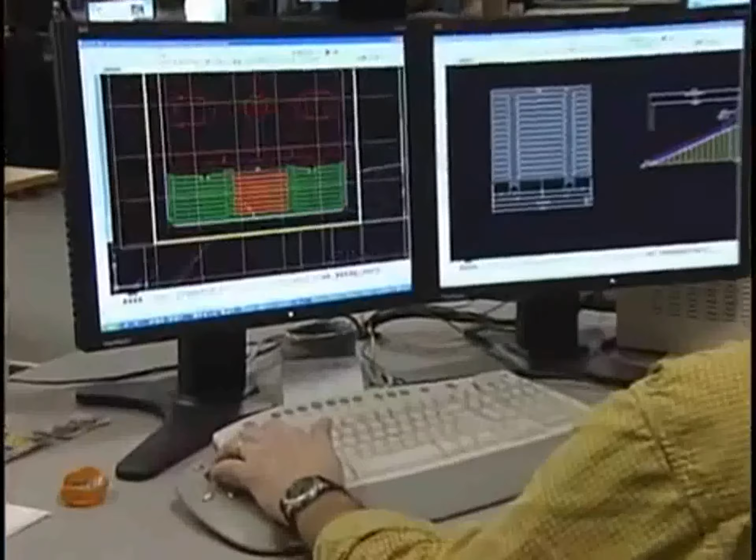Section 8. Review. In this course, we have listed and illustrated a glossary of terms common to the bleacher industry. We've covered telescopic seating system design considerations. Bleacher types, such as wall attached, recessed, reverse fold, freestanding floor attached, and mobile bleachers.

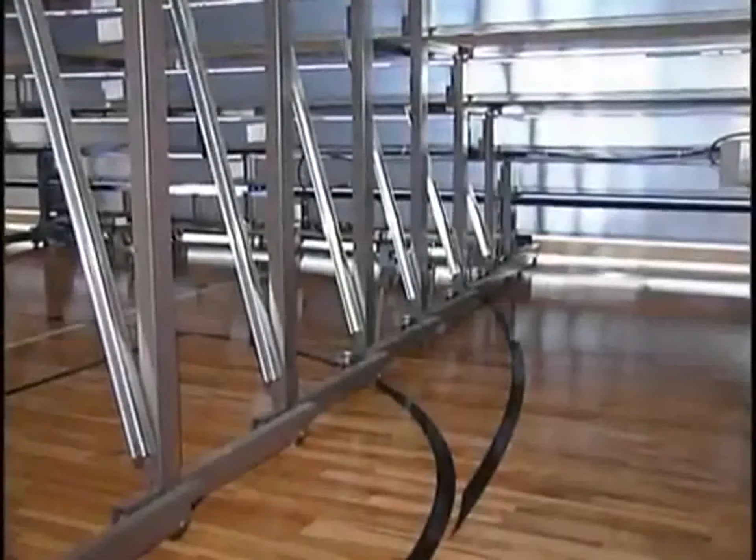Learned about common seating surface options and discussed applicable codes pertaining to aisles and ADA requirements, such as end rails, aisle rails, intermediate steps, end curtains, power systems, and backrests. You learned some basic components of the bleacher understructure, and we pointed out important considerations for coordination with other trades.